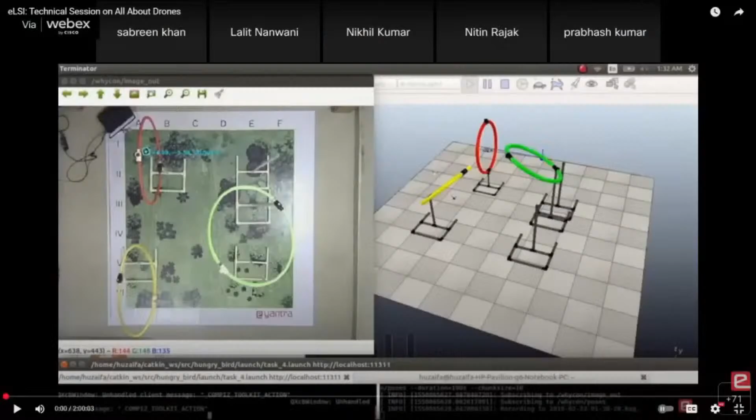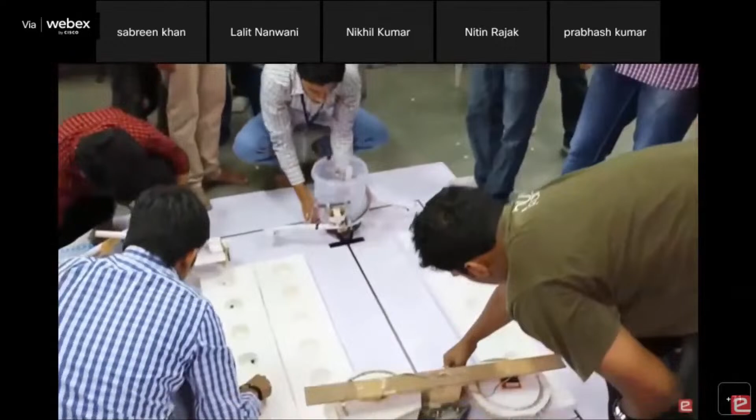...which trains students in complex engineering skills whilst they compete. The participants are mentored by eYantra engineers with exceptional guidance and engagement through project-based learning. The winners are awarded a cash prize, a summer internship by eYantra, and the chance to visit the IIT Bombay campus. The outcome is that students excel in their placement interviews.

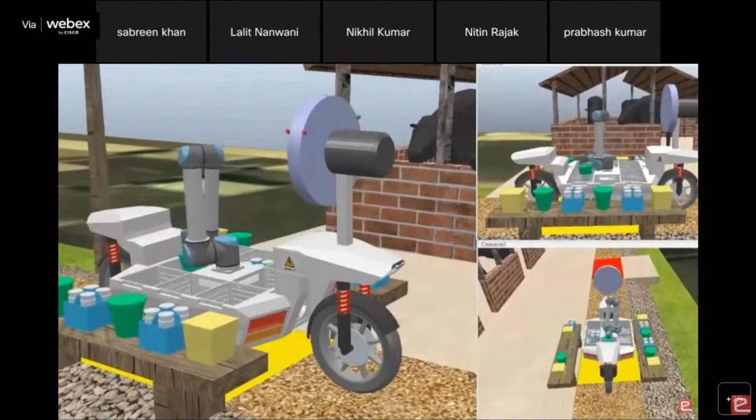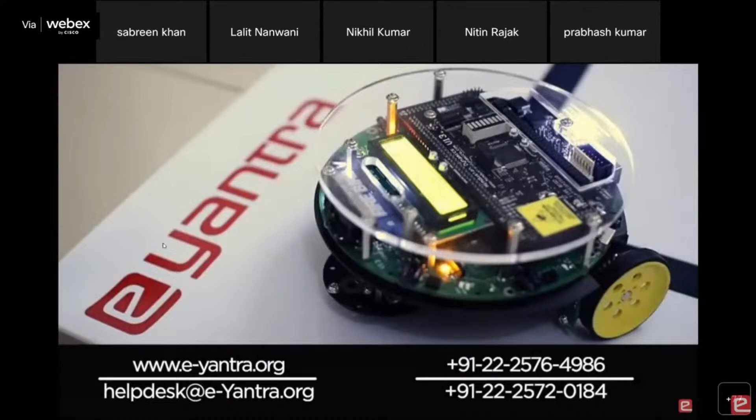Young people in very hardcore and complex engineering skills at a distance. And we do it with large numbers of students. Like, for instance, the registrations of the eYantra robotics competition are on at the moment. And through the competition, we train students because students love to do competitions. So we've packaged all the Gyan into competitions and we train large numbers of students, 30,000 plus every year, and

make them capable of landing really good jobs afterwards in placements, make them capable of going for higher degrees at the best universities, both in India and abroad, and make them capable of even doing startups. A lot of spontaneous startups have happened as a result of the experience that students like you have got in our competition. Like, for instance, there's a startup called Drona Automations in Bangalore, which does sewer cleaning robots.

There's a startup that makes drones for surveying mines, for instance. There's a startup that does robotic rehabilitation equipment. And these are hardcore engineering startups, not like these startups which are based on data and apps and websites and stuff like that. They are actually manufacturing engineering products.

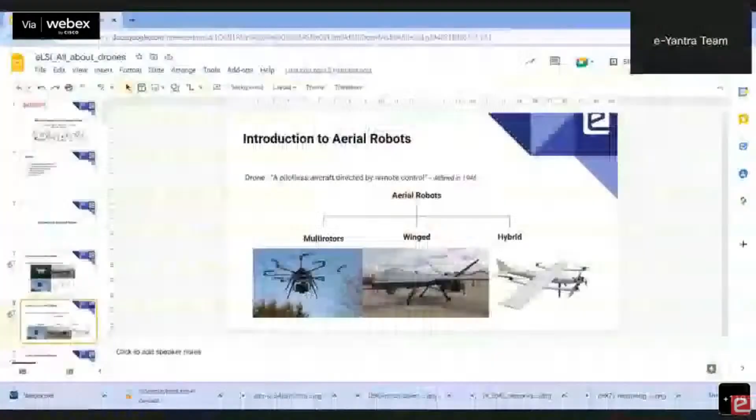Okay, so let us start. As you all know, this session is all about drones, and it is presented by the eYantra team, with Kavi Arya as principal investigator and myself conducting this session. I'm Smit Kesaria, as Ruchi introduced. I am a student of masters in IIT Bombay. Previously I was also a participant of eYantra, then I joined eYantra and am a staff member of eYantra also. And in general, I am very crazy about drones, very interested in drones and aerial robots in general. So yeah, that's about me.

Okay, we can start the session. Let's first discuss our agenda today. These are the 6 points that you all saw in the poster also. First we'll introduce ourselves with aerial robots, then specifically look at quadcopters and their workings, then understand how one makes a quadcopter. Then we'll see some technical details about control systems in drones, then go through high level planning, and finally the applications of drones and quadcopters in general.

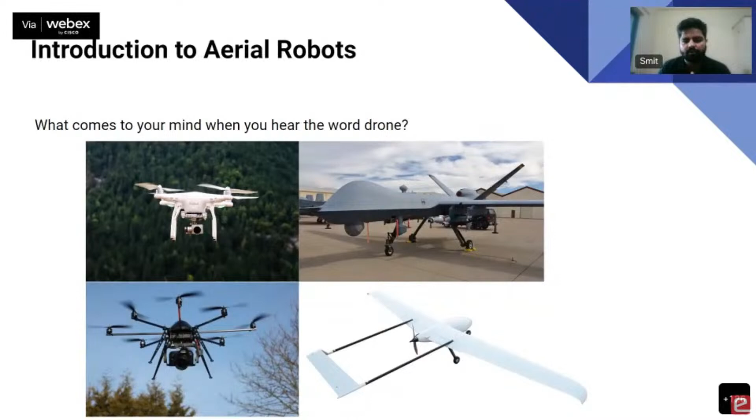I think most of us would agree that the first one is what comes to mind when we think about drones. But let me tell you, all of these pictures are termed drones. Even the bigger aircraft on the top right is a drone, the small plane-like thing at the bottom is also a drone, and this huge camera thing is also a drone. So let's define what a drone is. It was coined back in 1946, with a simple definition: a pilotless aircraft directed by remote control. So if an aircraft has no human sitting on it and is controlled remotely either by a computer or by a human, it's called a drone.

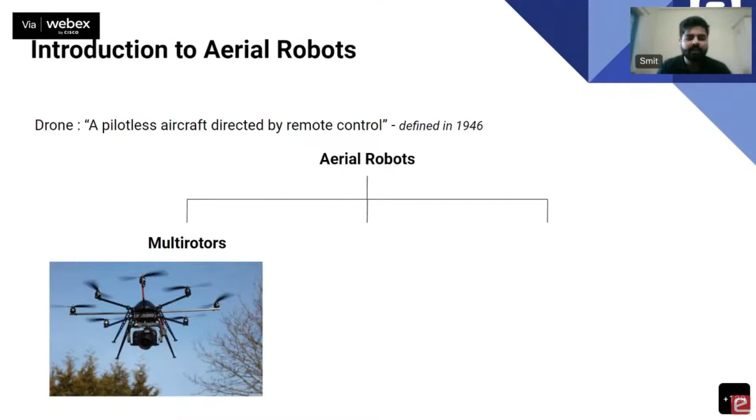So let's not use the word drone since it's very broad in general. I'll use the word aerial robots instead, and classify them into basic categories like multirotors. Multirotors are aircraft with multiple rotors, more than two, and they look like this. The first and second images from the previous slide were multirotors. As you can see, there are multiple rotors, and it uses these to generate lift and fly.

The other class of aerial robots can be categorized as winged robots, or winged aerial robots. These are usually plane-like structures, where again a human does not sit on the plane. It's a remotely controlled or autonomous aircraft without a human, based on wings, usually with a single rotor or engine, though it can be dual rotor also. If it primarily uses wings to generate lift and fly, it's called a winged aircraft. Then there are hybrid aircraft also, which use both, having wings also to generate lift.

If people might know how wings generate lift, I will not go into details, but we have an idea that wings do generate lift when flying in air. And if the aircraft uses wings to generate lift as well as multi-rotors to maneuver or do some actions, then it is a hybrid aircraft.

So you can see the first image and second image. If you try to combine and make something hybrid, this will be the result. So for today's session, we'll specifically revolve around multi-rotors and not the winged and hybrid aircrafts. And even in multi-rotors, we have to see what all kinds of multi-rotors are existing.

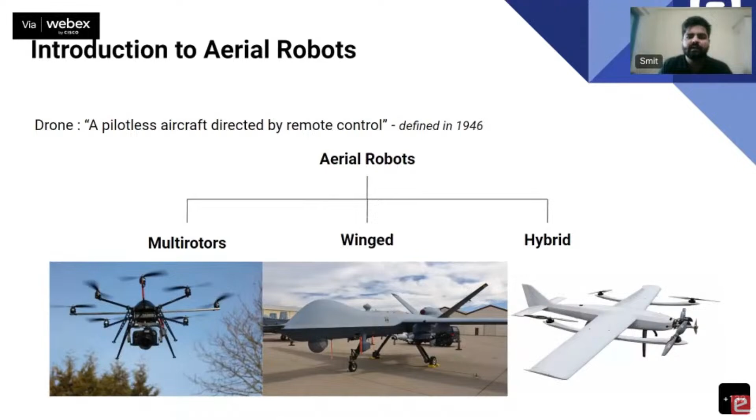So again, multi-rotor's definition is very simple: a rotorcraft with more than two lift-generating rotors.

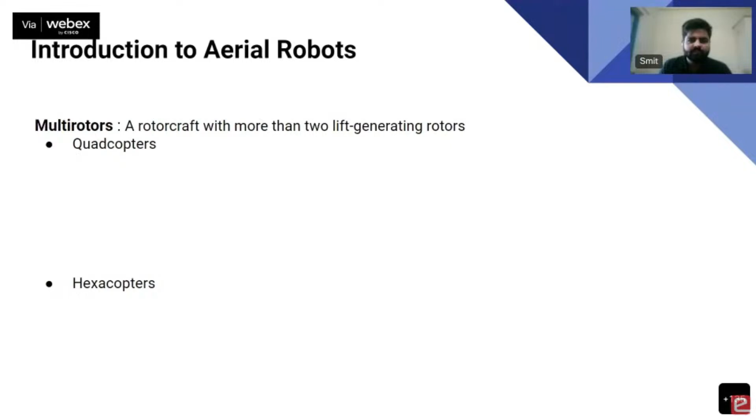So classifying multi-rotors based on the number of rotors, it can be classified as quadcopters, which by the name suggests they have four motors, and they look something in general like this, with four motors and some kind of body with some kind of landing.

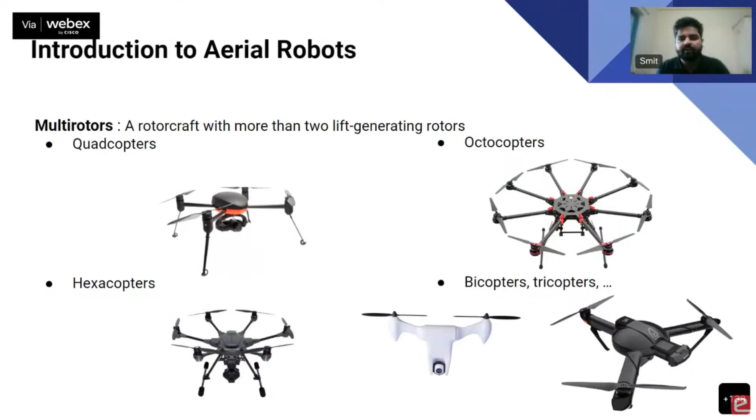Let's deep dive into the quadcopters, because again, they are very famous, very easy, very common. Let's see about the workings and the functioning of quadcopters in general.

As we all know, a quadcopter has 4 propulsion systems, 4 propellers, 4 motors, whatever you call them, 4 thrusters. They are usually placed in a square symmetric shape. Although there are unusual geometries with trapezium, you can see with a rectangle geometry. Here you can see it's symmetric—the distance between 1 and 2, 1 and 4, 3 and 4, every distance is the same. So it's a square geometry.

But as I said, there are unusual geometries also, which are recently being used for different purposes, so let's not go into that. Usually, for a quadcopter, the propellers are placed in a square shape, and they can be numbered in any fashion. Different protocols are being followed by different systems.

The point to note here is, if you see, 2 of the motors rotate in a particular direction, and the other 2 motors rotate in the opposite direction. So if you define clockwise and anti-clockwise, motor number 1 and 3 shown in the figure rotate in the clockwise direction, and 2 and 4 rotate in the opposite direction.

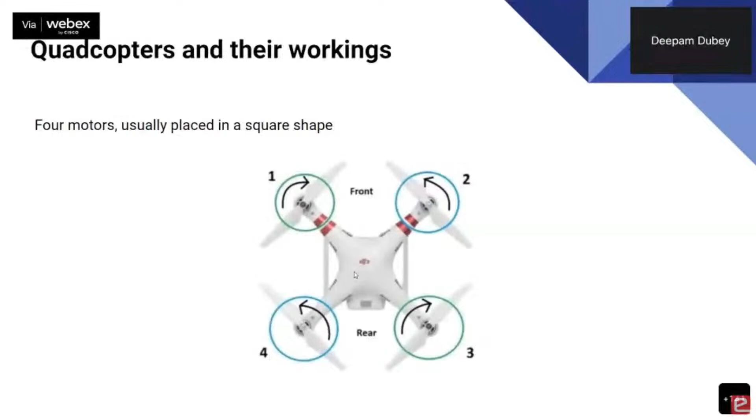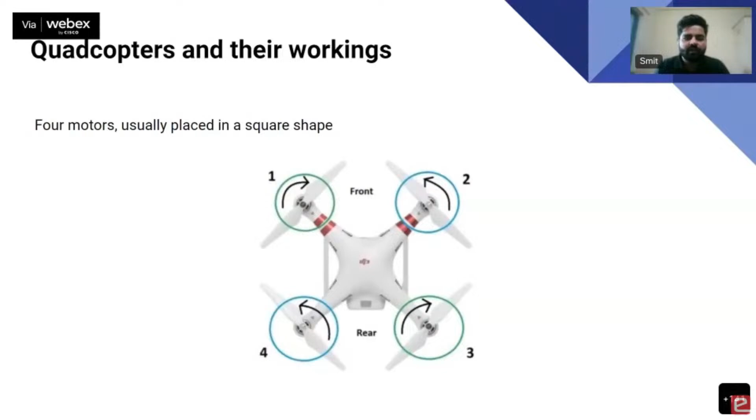So motor number 2 and 4 rotate in anti-clockwise direction. This particular configuration is not random, it's specific. The point to note here is the diagonally opposite motors always rotate in the same direction, and adjacent motors across the sides rotate in opposite directions. We'll figure out why this is the case, and why we can't just rotate all motors in the same direction, or why this specific configuration. We'll see in the next slide how it flies first of all.

Since it has only 4 motors, there's a thumb rule, a rule of physics, that says the number of actuators will give you the number of degrees of freedom. I won't go into detail about degrees of freedom and actuators, but if there are 4 motors and 4 propellers that can be controlled, then you can have 4 degrees of freedom. You can move in 4 degrees, not more than that.

Deepam, I think your mic is on, can you please turn off? Sir, can you please repeat? Repeat what? The thumb rule of physics that I was saying. Yeah, sure, I'll do that. Just a second, is my screen still completely visible? No problem, yes sir, it's visible.

So what I was saying is this robot has four actuators. Four actuators meaning four moving parts, which are the four propellers. In a robot, if you have let's say n actuators, at max you can have independent motions in n degrees of freedom. Now what is degree of freedom?

Let's say you are moving in a particular direction, let's say this is the x-axis. That's one particular degree of freedom, you can move in that particular direction. If you can move in another direction also, that's another degree of freedom. So lateral movement as well as rotational movements are considered degrees of freedom. Let's say the drone can rotate in a particular axis, the entire drone - that's one degree of freedom. If the drone can rotate in another axis, then that's one more degree of freedom.

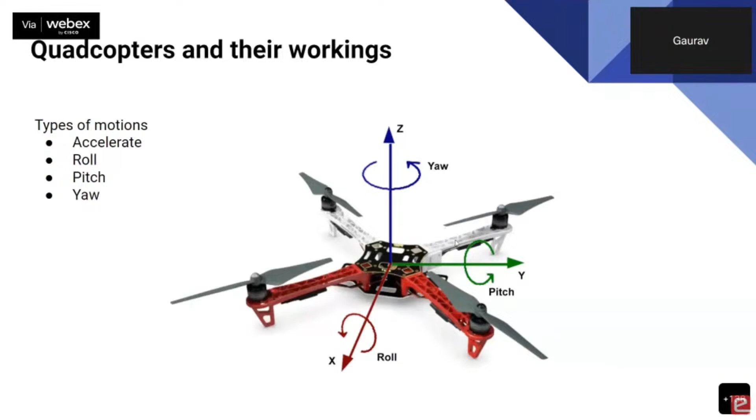I didn't hear that. Sorry. Decrease the speed of the diagonal motors. Okay, that will do the job. Yeah, the answer is correct. But that will not do the job completely. So if you decrease or create an imbalance.

So first of all, the principle that we are using here is the principle of rotational momentum. That's again a physics law: if a body rotates around its own axis, it has a momentum. Just like a body with a mass traveling at a particular speed has lateral momentum, which we have all studied in physics, a body rotating around its own axis also has rotational momentum. And the rotational momentum of the entire body has to be conserved.

So the very first question I had during the previous slide is why not rotate all the motors in the same direction? If I rotate all 4 motors in the same direction, all the rotors' rotational momentum will add up, and it will be non-zero. It will not balance. So since the system has to conserve its momentum, the drone in general will rotate in the opposite direction if I move all the rotors in the same direction.

So to solve that problem, we rotate 2 motors in a particular direction and the other 2 motors in the opposite direction. If the direction is opposite, the momentum cancels itself in an ideal situation. If all the rotors rotate at the same speed, with 2 in one direction and 2 in the other, the momentum is cancelled out and the drone will not rotate on the axis. But if I want to move it in a particular yaw direction, I have to create the imbalance, the difference.

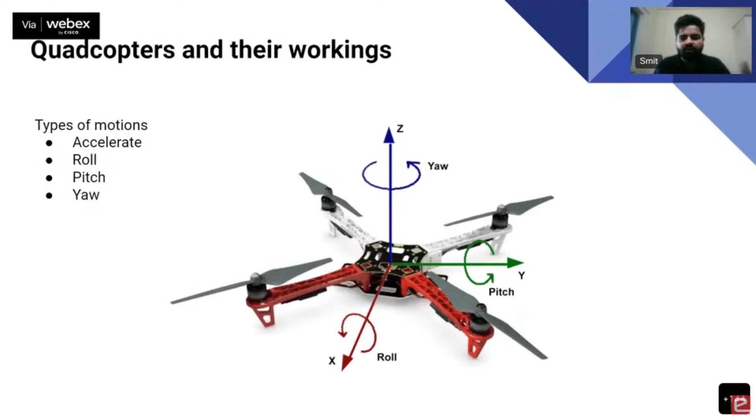So the very first thing is the frame. I need a particular chassis or a frame to hold all my components together. As you saw in the previous diagrams, this is a frame. The red and white thing that you see, the chassis, is a frame, and on top of that we have the components, the motors, the batteries, the electronics, and other things. So the first thing to start is to have a frame.

Then to fly, obviously we need propellers. So propellers should be there. But to rotate those propellers, we need to have some actuator, which is a motor. And usually, since we are making a small version, we will go with electronic devices, which is a motor again. So we'll see which kind of motors we should use.

And to drive these motors, it's not that simple. You just cannot connect it to the battery directly and the motor starts rotating. That's not how it happens. So you have to have a motor driver. So again, who will give a command to the motor driver? Should I give the command to the motor driver directly, or should there be an intermediate flight controller between us? So the answer is a flight controller should be there.

We'll later know why. So yeah, the flight controller is one of the components that we need that takes care of all the computations and all the adjustments and intelligence on the quadcopter. So a physical board has to be there, a small kind of computer has to be there, with the flight control.

And then once the quadcopter is flyable, how do I interact? How do I send it commands? So I have to have some kind of wireless system because I cannot make it wired. It's a remote controller. So it has to be a device and its receiver has to be on the quadcopter. So a remote controller transmitter and the receiver.

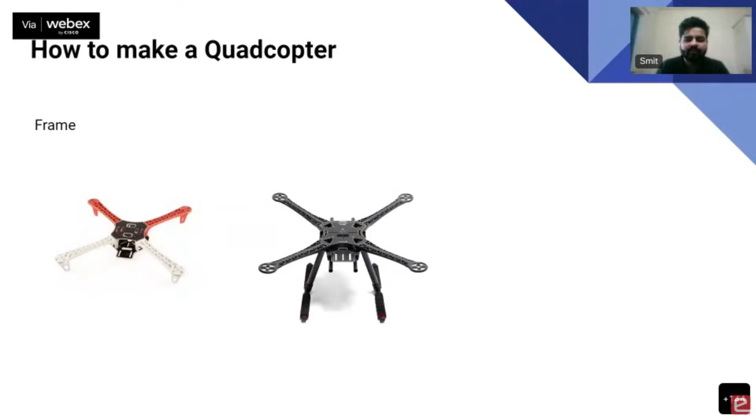So materials do matter here, because if it's an aerial robot like a quadcopter, it's very agile, it might crash. Crashes are bound to happen, so the materials matter. This is a plastic frame. You can choose a good-looking, aesthetic frame with more features, like this one, which has a landing gear and some extra holders or compartments.

The middle one is a plastic frame, but if you want it to be more durable, strong and lightweight at the same time, you can choose a carbon fiber based frame. It's a similar structure to the second one, but made completely of carbon fiber. If you see, the rods and the body are made of carbon fiber. So this is about the frame.

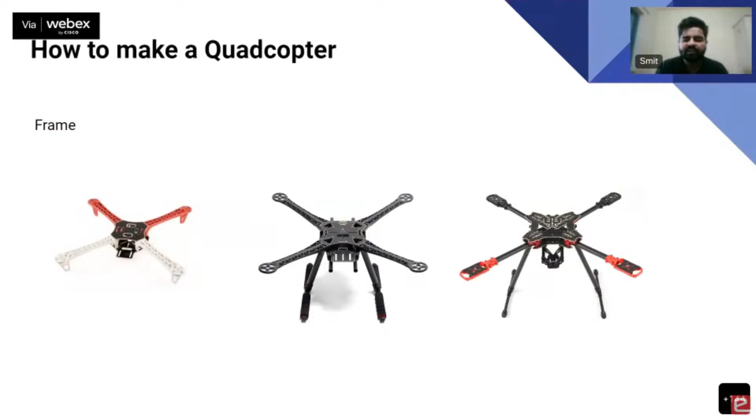So let's say you designed and built your own fairly symmetric frame, or you bought it. Now what you need is propellers. Let's not go into the details of what size and so on; you can find that later. But I'll just brief about the materials and types of propellers.

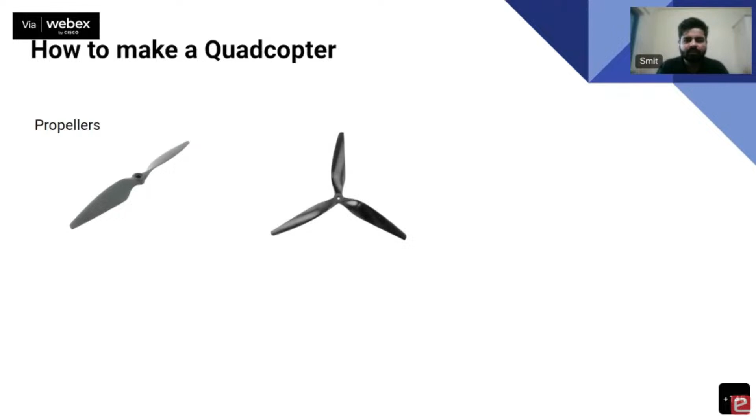So this is a bi-blade propeller, if you can see here. It has two blades. This is a plastic one again. This is a tri-blade propeller. The thrust will be a little more, and you can also go with a 4-blade, and it continues; there is no defined limit. You can have a 5-blade, 6-blade. I have even seen propellers with 32 blades, 64 blades. But to keep it simple, you can continue with 2, 3, or 4.

And the materials matter here again. The materials can be classified as plastic, like this one. This is the same bi-blade propeller, but in a carbon fiber form factor, completely made of carbon fiber, and very unusually you can also see wooden propellers. So coming to the motors, which will...

Excuse me, can I ask a question on blades? Sure. Sir, why do we need 3 blades, 4 blades, up to so many blades? What is the purpose of using multiple blades in propellers? Yeah, the question can be answered with aerodynamic theory. But if you have more surface area and more blades, at the same given velocity you can have more thrust. So these are powerful propellers. If you want the same motor, same velocity, but more power, you can increase your blades. That's the simplest answer.

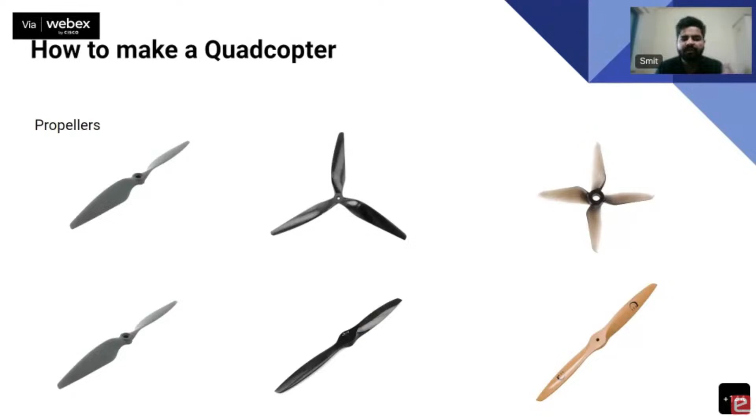Okay, sir. Thank you. But at the same time, you will decrease your efficiency, so battery power will drain a lot in that case.

Coming to the motors part. There are many types of motors, but let's just classify and see which motors are usually used in quadcopters. A very common type of motor that we have seen in remote control cars or hobbyist toys are the brushed motors. They look something like this or this. I am sure most of us have seen the second image. This is the usual motor used in robotic toys and other things. So these are the brushed motors.

I'll not go into details of what brushed and brushless are and their advantages. But for now, just remember these are the brushed motors, which are not that efficient, not that reliable, and not long lasting either. So you can think of the brushed motor as the bad guy. I am making an impression here, but you can think of it as a bad guy. The good guy here is the brushless motor.

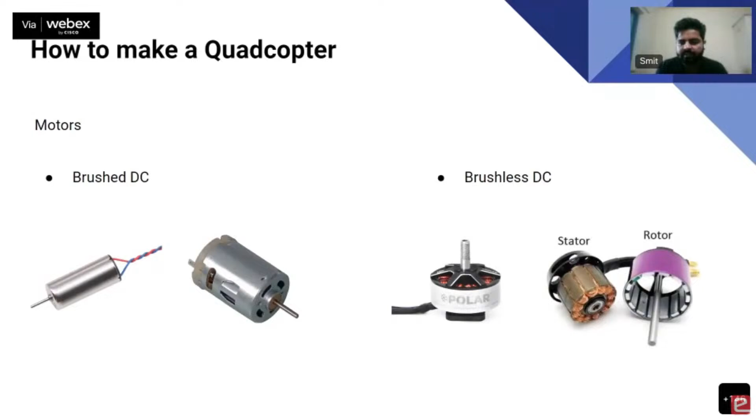By the name, you can see this motor had brushes. This motor does not have brushes. That makes the motor more long lasting. It is more reliable, and very good. All the bad things are removed. It does not heat up that much either. They look something like this, and internally they look something like this. So there's a stator and the rotor. By the name, you can see the stator stays where it is, and the rotor rotates around it.

So this is the type of motor, and let me tell you clearly that most likely, whatever quadcopters you might see around you are made using brushless motors. A very small fraction of quadcopters that you see in the toy ranges or the small ranges use the very first motor that is shown in this image. Among the 4 images, the very first motor that you see on the left is the motor being used for very tiny quadcopters. But apart from that, usually brushless motors are used. And if you plan to make your own quadcopter, this is what you have to go for, brushless motors.

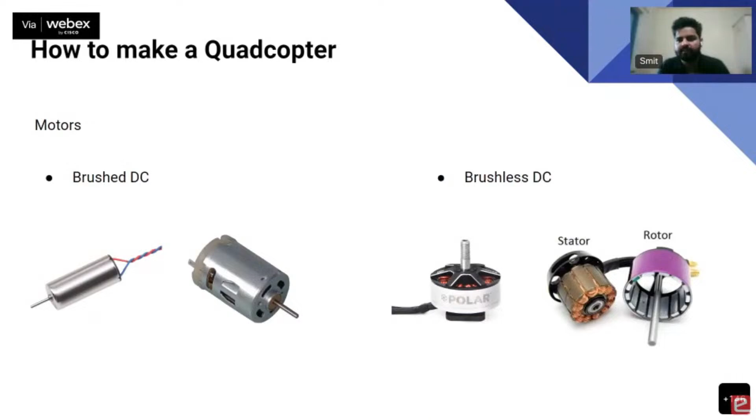So now coming to motor drivers, as I said, motors are complex to be driven. You cannot just connect the power to the motors. You have to drive it through a driver. So again, there are 2 types of motors. There are 2 types of drivers also. So for brushed motors, we have simple drivers. These are usual hobbyist or enthusiast components found in online stores and offline stores also. This is a L298N driver. I'll not go into the details here again.

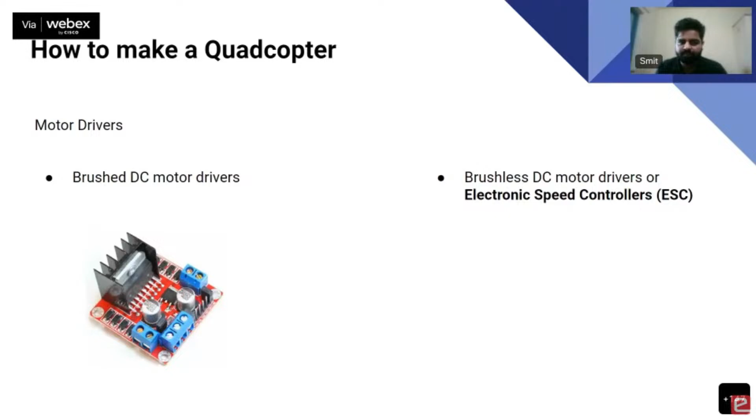But coming to the more important point, which is the brushless motor drivers, these have a specific name. They are called electronic speed controllers. So there is no fancy thing in the name. They are electronics and they control the speed of the motors. So that's why the name electronic speed controllers. And these are usually used for the brushless motors, and they look something like this. So you have 3 wires for the motors, 2 wires for the battery, and some signal wires to control.

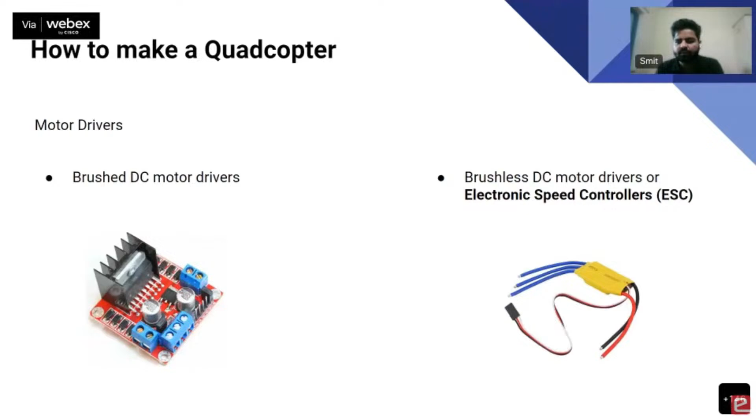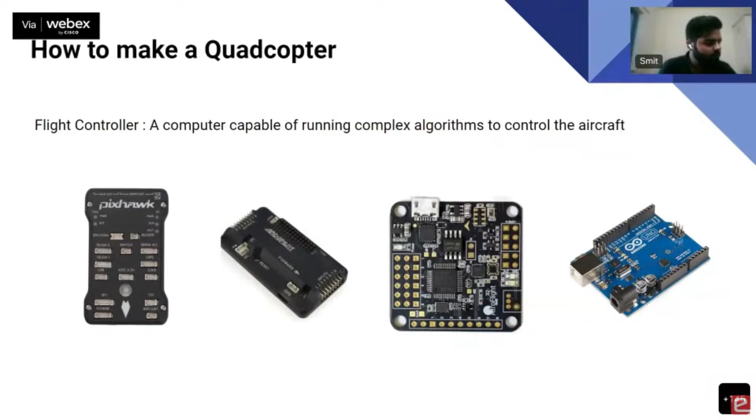You can use any kind of general purpose microcontroller. The one shown here is the Arduino Uno. This can be used as a flight controller, and just adding the IMU sensor will make you good to go. So options are endless. There are so many flight controllers available in the market with different standards, or else you can make your own with general purpose microcontrollers. Okay.

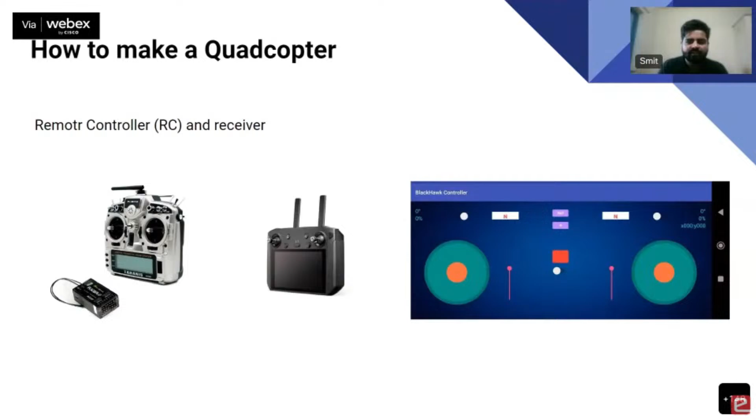This particular app was built by an intern at eYantra who came to the competition, performed well, got an internship, and during the internship we built things like this. The app was built from scratch within 6 weeks, and the motive was to eliminate these big fat huge controllers and have a simple, common solution. So you can have joystick based controllers with some buttons here and there to control the quadcopter.

Continuing, so now the quadcopter is functional. It has motors, a flight controller, and a remote control interface with myself. But if I want it to stay stable by itself, stay at the position where it is without any inputs from me, and I just leave my hands off the controller, I want it to stay wherever it is on its own.

So I need some kind of sensor to read my current position on the quadcopter, so that I can at least know where I am standing, and if I am moving because of the air or other disturbances, I have to correct myself. So some kind of sensor, some kind of feedback has to be there, and for that, as I mentioned previously, the GNSS, Global Navigation Satellite System, receiver has to be there.

As we all know the working of GPS, GPS is one of the GNSS of USA. So let's not use the word GPS as a general term, because the general term is GNSS, and GPS is the GNSS of USA. We also have our own GNSS, which is NAVIC, if you've heard about it. Other countries also have their own: Russia has GLONASS, China has BeiDou, Europe has Galileo. These are all satellite constellations, and in general it is called a GNSS receiver. What the receiver does is, using the satellite navigation system, it gives you your position on Earth. Once you have a position on Earth, you can use that to control your quadcopter's position.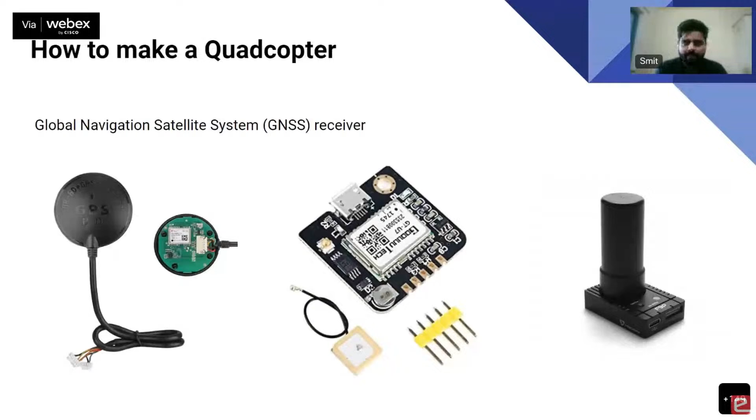Okay, if there are no more questions, I will proceed further. So everything is done - the motors, the sensors, the flight controller. Now to power everything, we definitely need a battery. Let's just look at it - sir, I have a question.

Hello sir, I have a question. Yeah tell me, sir, I have a question. And you can go ahead with the question. Sir, I have a question. Hello, am I audible? Yes, you are audible. Whoever has the question, kindly go ahead with your question please.

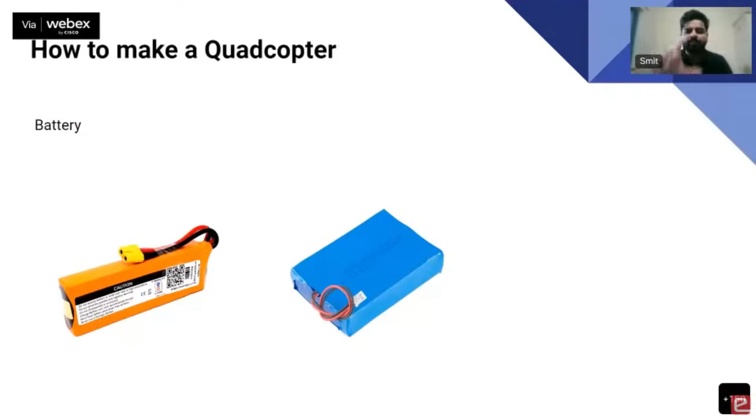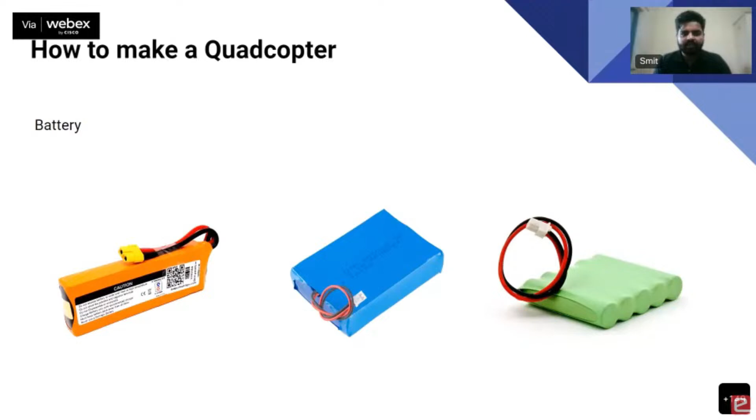There are lithium-based cells also, just like the ones we use in our remotes and all, but they are actually based on lithium salts and lithium technology. We can also build battery packs using cells, though not as commonly used in quadcopters. We can also have nickel metal hydride, a salt used to make batteries - a separate, non-lithium battery, but still one of the common batteries seen around in robots. Specifically for quadcopters and aerial robots, the first one you saw, the lithium polymer based pouch type battery, is usually used.

So the last thing - now all the hardware is taken care of, but at the end we have to have our software that runs algorithms and calculations continuously for us to be able to fly the quadcopter. So the last but not the least thing required is the software or firmware that goes on the flight controller board that we chose earlier.

So there's no need to worry because it's a fairly complex piece of software. It is not something one can write and learn very quickly.

So there are options already available, pre-written codes, pre-made software on the internet, free for all to use. Some of the popular ones are the PX4 flight controller. Do not confuse yourself with PX4 and the PixHawk you saw earlier. They sound similar, but they are different. The PixHawk was a standard for hardware, and PX4 is the software that goes on that hardware.

PX4 is used for autopilot systems, as ma'am was asking previously, if you want an autopilot feature instead of a human controlling it manually. This is one of the very widely used systems, PX4. You can go check about it later.

A similar alternative is ArduPilot. This is another ecosystem for autopilots, free to use for all, and completely open source.

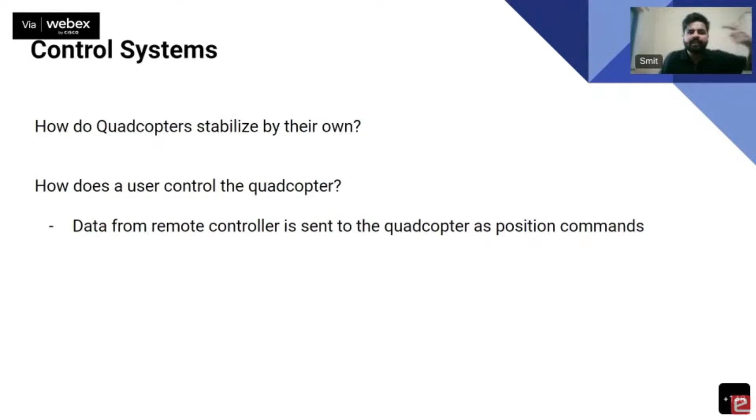But how does the drone make sense out of those commands? How does the drone actually implement those commands? Let's see the structure of control systems.

Starting with the basics - we all know a quadcopter has motors which make it fly. But the motors have an interface: we have to provide voltage, we have to provide current to the motor. Obviously a human would not want to change the voltage and current manually, so we have a driver that drives the motor.

Now what is the input to the driver? The input is RPM. The driver just wants to know what RPM the motors have to be rotated at, and it will take care of it. But the RPM itself has to be decided by someone - is it us, the user?

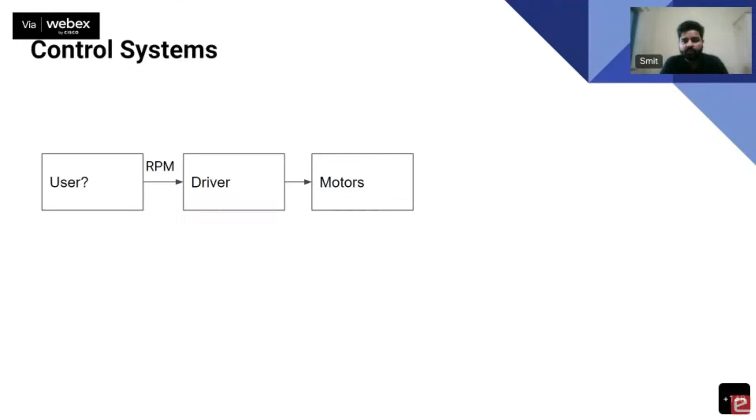Do you think sending all 4 motors' rotation speeds manually would be easy to control the drone? I would have to take care of all 4 motors, running an algorithm in my mind continuously, adjusting all 4 RPMs to make the quadcopter move. Is that feasible at all?

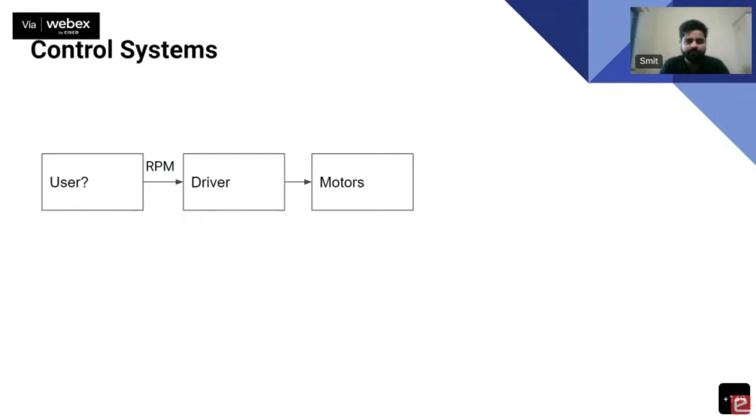In fact, the human brain is not even capable of doing that. So we have to add a controller in between. And what is this controller now? What it does is, instead of the user giving commands to the driver directly, the user gives commands to the controller. And those are a little easier commands, the angle commands. Now the user is just giving angle commands to the controller. This controller is taking care of the orientation control of the quadcopter.

Now, what is the interface? If I just let the controller know that I want the quadcopter to be tilted at 5 degrees in the pitch axis, this is my command to the controller. Now the controller has to make sure that the 4 motors are driven in a particular fashion such that the 5 degrees of pitch is maintained, and that will control the motor drivers or motors in general. So the controller does my job. So how does it do it?

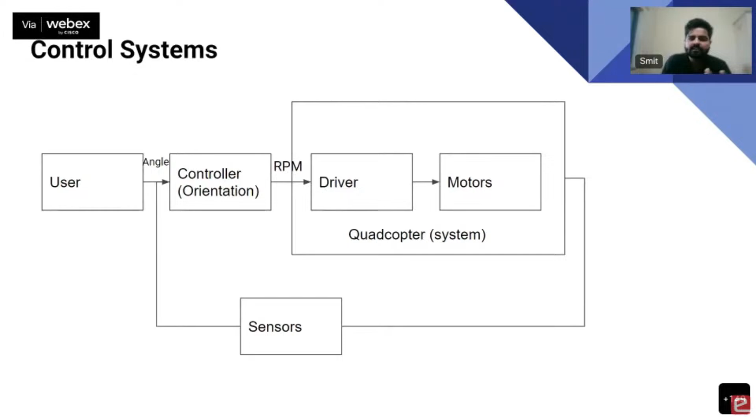Let's just define the driver and the motor collectively as the quadcopter system, and then we have a sensor. Previously we saw there was a sensor that used to give us the rotation. Can anyone recall it? Let's see how much attention we are paying in the session. Sir, IMU. IMU, the full form is inertial measurement unit. Yeah, the inertial measurement unit is the sensor that is used to read the current orientation of our quadcopter.

So now if you see in the diagram, what is the job of the controller? The controller has 2 inputs now. The controller has the user angle, what the user wants. Yeah, feedback. You're correct. It is the feedback. The user gives it the angle; it has to go to 5 degrees. Then the controller will read the current angle of the drone. Is it 5 degrees? Is it 1 degree? Is it 0? Whatever it is. If it is not 5 degrees, it will know the error.

Now, with some basic algorithms written inside, the controller will try to minimize that error. It will try to take the entire quadcopter to that 5 degrees or whatever set point the user has given. So it knows the current reading, it knows the user's input, and it tries to match both. This is what the controller, the firmware, does in general. It takes the angle inputs from the user, the angle inputs from the sensor, and drives the motors accordingly to perform the action. So this is the orientation controller.

Now again, think: is it okay for the user to give the angle commands? It is okay, we can definitely fly, but is it easier? You have a remote controller, and the 4 inputs you have are the throttle, roll, pitch, and yaw commands. If you want the drone to stay at its given position, you have to continuously make adjustments. If the quadcopter is moving forward, you have to bring it back. If it is moving right, you have to bring it left. So continuously you have to change your angles as well as the throttle commands. These commands are a little difficult for the user to control.

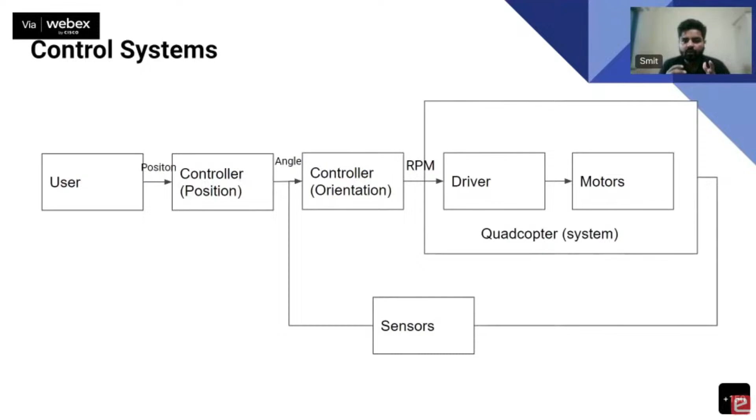So we have to have a position controller to implement this. What does the position controller do? It takes the position input from the user, converts it to particular angles, and feeds them to the next controller that is taking care of the angles. So now is the diagram complete? Is just the position from the user enough? How does the controller know the drone's current position? Can anyone tell? Something is missing in this diagram.

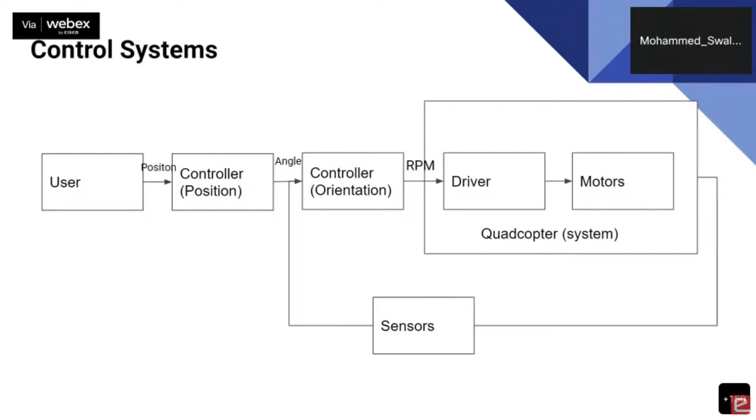The user should give the direction controls. Yeah, the user is giving the direction controls. But if you compare the previous diagram, the controller diagram of the orientation, it had orientation commands from the user and it had orientation feedback from the quadcopter. So it can check the errors, it can check what has to be done. But now in this diagram, something is missing.

The GPS. Perfect. So some kind of sensor is required for position. Till now, we do not have any sensor for position. So the sensors have to have a position feedback also fed back into the controller. This is what we mean as feedback. And I've just created the same block for both the sensors, the IMU and the GPS or the GNSS sensor.

So again, the GNSS sensor's position, not commands, the feedback will go to the controller, and the controller has a similar job to do. Take position inputs from the user, read the current position of the quadcopter, and see how much error there is, and then with some formulas, with some algorithms, you convert those to actions in roll, pitch, and yaw.

So now this is the complete, easy system that we have built, and this is called a controlled system. So if you see the quadcopter as a system, this existed just as a system. It was not controlled. It was not easily controllable by the user. But by adding these blocks, adding the controllers for orientation, adding the controllers for position, and adding some sensors, we have created a controlled system. So this is what we mean by a control system.

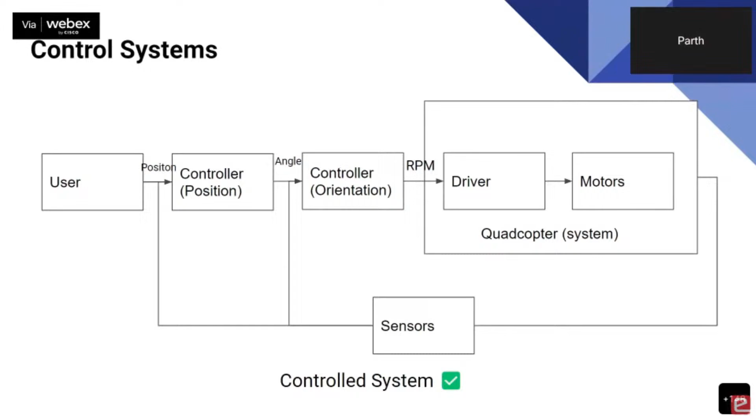It's the same thing. Now I've not shown how the controller functions internally because it's very complex. So it's not in the scope of this session. So that is what I was talking about. That is what you will learn in the competitions. Okay, thank you, sir. Yeah. Any other questions at this particular point about control systems?

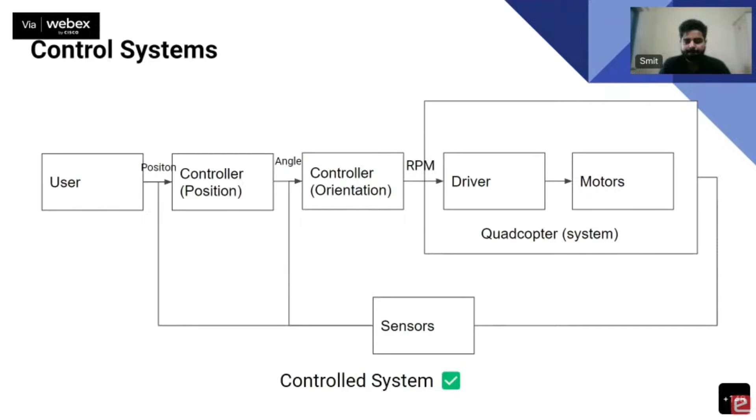Okay, then I can move forward. So now, till this point, we have made our own quadcopter. We have taken care of the control systems, all the firmware that it has. Now it is able to follow human commands. But what if I want to make it completely... Yeah, someone had a question?

Okay. So what I was saying is now the human is able to control the quadcopter in a position or an angle mode, whichever the human wants. But now if I want to make it hands-free, make it remote control-free, and make it a little more autonomous, then what to do? That's called higher level planning.

So you plan some things before. You tell the quadcopter to do this particular action prior to the flight, and then the quadcopter executes those steps or motions or whatever actions in a particular sequential way. So then the user does not have to control it manually or make it go to a particular velocity or position. The quadcopter does it by itself. So how does that happen?

So there are two stages of high level planning. One is called a mission mode. People who are familiar with PX4, Pixhawk, ArduPilot, ArduCopter might have seen, or at least heard about, this kind of thing, which is called a mission mode. Now, what is mission mode? Since we already have our GPS or GNSS sensor, we can give it coordinates in latitude and longitude on the Earth.

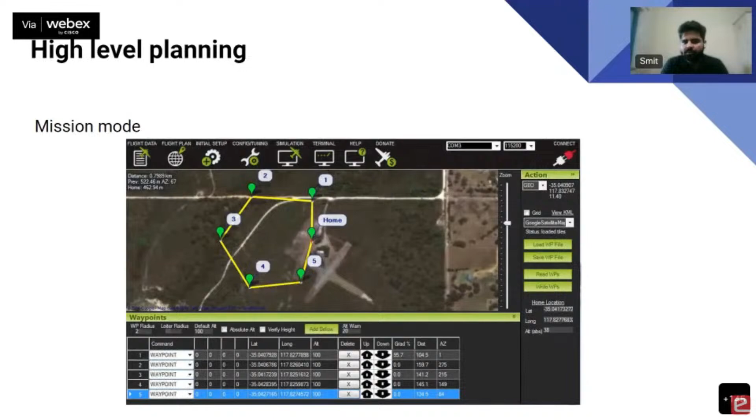So what will happen? Now we are saying the quadcopter is autonomous, but does it know about its surroundings? Does it know where there are obstacles? Does it know that it is going to crash and be destroyed? It does not know at this point. So going for more autonomous things, there is path planning on board. The path planning that we saw is done by humans, and the path planning that I'm talking about now is completely autonomous. This is a little complex. Once you are familiar with this, you can go forward with it.

So there are two basic scenarios. One is a known environment where you have a map. It's just like Google Maps, where we have details about everything. We have details about the buildings, information about the roads, sometimes information about the trees also.

A* is one of them. I'll not go into the details, but I'll just list everything. A* is one of them, which is the very well-known algorithm to solve path planning. Dijkstra is one of the algorithms, which is a pretty common name. And rapidly exploring random trees is an algorithm for path planning.

So now let's say that's okay. When we know the environment, it's easier. There are buildings, there are trees. We all know them, but that's not the case always. Now just consider a hypothetical scenario of going to Mars. Recently NASA launched the rover as well as not a quadcopter but a drone. It's a single drone on the Mars planet.

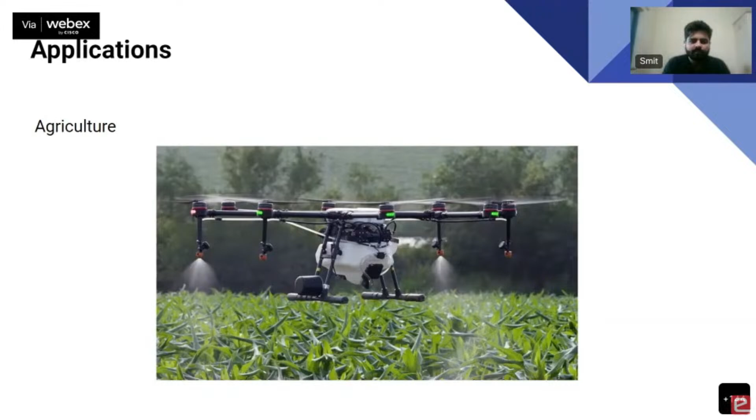There are 8 motors here, and spraying fertilizers, water, or seeds, throwing seeds, or even mapping or surveillance of the plants can be done by quadcopters today. Coming to mapping, mapping and photogrammetry is a very recent application of drones, and it is being used literally everywhere. The maps that you see on Google Maps are created by satellites.

So satellites from space take images of the Earth, and then processing happens, and they create maps. So if a satellite from that height, that range, can do that in a decent manner, just imagine how drones could improve mapping and how quickly it can happen, because satellites take a lot of time to update. Some satellites take literally 6 months, 8 months to update your surrounding maps. But if you have drones flying around updating your maps, that would be very quick and very accurate.

So photogrammetry, the word photogrammetry here is very complex. What it means is that you recreate, reconstruct, using photos. So let's say there is a

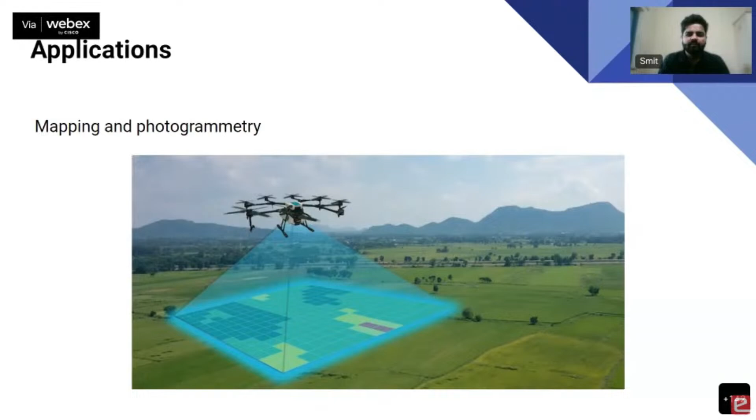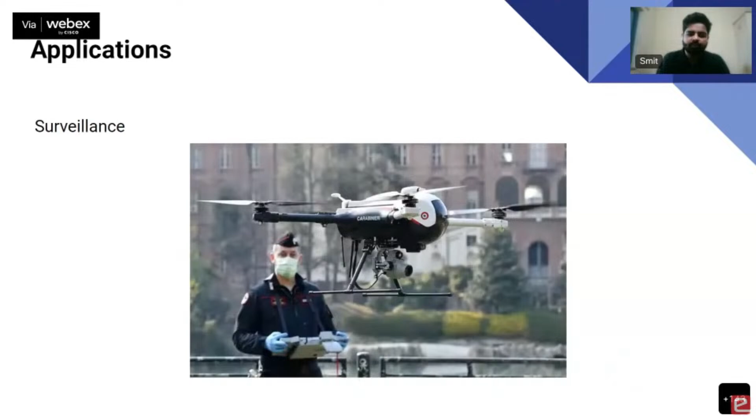Continuing, so photogrammetry is a recent technology, and it is very, very useful to create 3D structures and reconstructions, and can be used anywhere. Another commonly known application is surveillance, by authorities, police, or security.

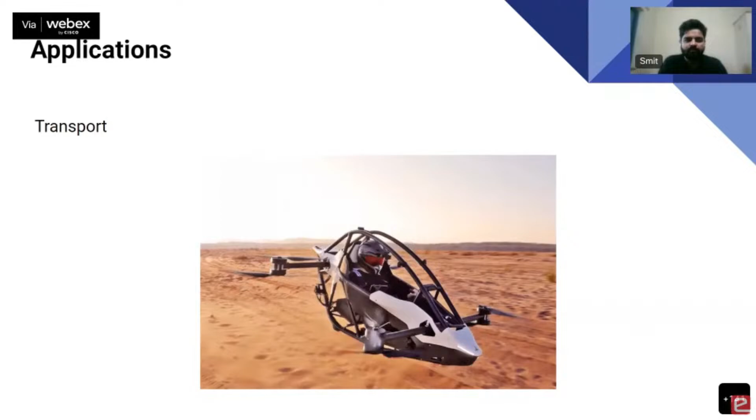But the structure that you see is not like the usual helicopter that has a single rotor. This is again like a quadcopter or an octocopter. So the working is similar. The structure is similar. Just the human is now sitting inside. It has the capacity to take that human and travel. So this is another future application.

The most commonly seen drones are DJI drones. DJI is a company based out of China. And coming to cinematography, there is a newer, very exciting type of drone that we are seeing around: the FPV drone. So what is the FPV drone? What does it stand for? It stands for first person view.

It's not the usual quadcopter or drone that people fly. You might have seen people fly cinematic drones which have the camera view on their screens, and then they adjust their view. But with this particular drone, the pilot has goggles which display the camera. The camera is on the drone. It streams in real time to the goggles, and from that view, the human flies it. So it's as good as a human sitting on the drone, piloting it.